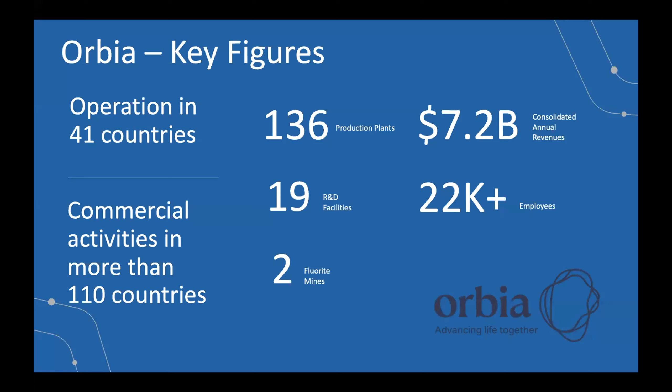I just want to start by talking about Orbia. Orbia is the mothership. It's the company that owns us. They're a fairly large corporation. They operate in 41 different countries. They have a bunch of plants. They have a lot of R&D facilities, a lot of people, and they also own 2 fluorite mines as well.

But when you look at their product sectors and their pillars, we're basically involved in building infrastructure, data communication, precision agriculture, polymer solutions, and fluor. So there's a lot of things that are interconnected in terms of our product lines and our pillars. When you look at Duraline as a company, we started back in 1971 and basically started in water and gas. So that's kind of where the birth of the company was.

I'm not going to go through all these innovations in history, but one of the things that Duraline has done very well is they've promoted new products. They spent a lot of money in R&D. To mention a few things that we're going to talk about, Silicore, which is now called Super Silicore. They've introduced things like aerial duct for above ground applications, locatable microducts, low smoke zero halogen, and FuturePath and jumbo, which we see in a lot of communication.

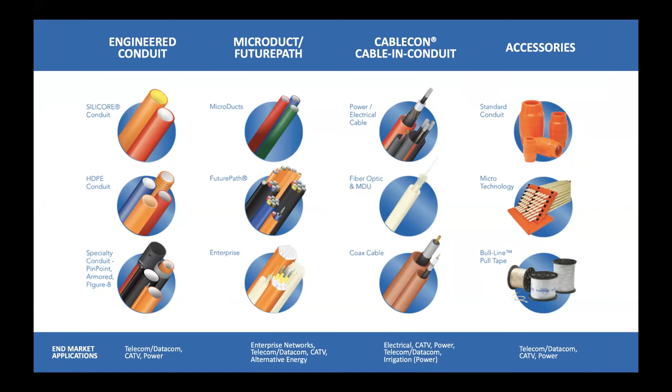And if you look at these engineered conduits and microducts and FuturePath and cable and conduit and accessories, a lot of them have surrounded themselves within communication cables. And now with the launch of PowerGuard, we're getting into the power side of cabling. When you look at Duraline in its global reach, we are all over the world, but you can see in the United States there's a huge footprint there, but we are global.

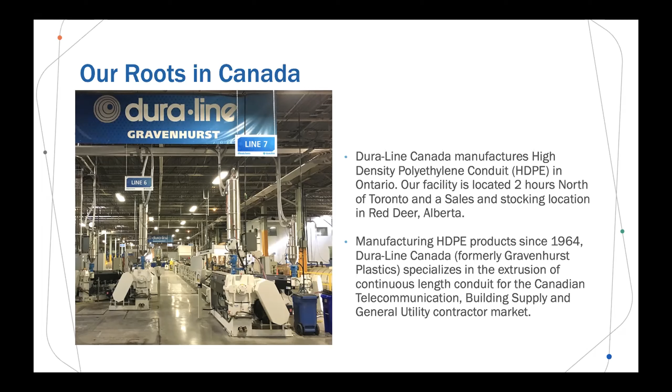And our roots in Canada: Duraline purchased our facility, which was 2 hours north of Toronto in Gravenhurst. It's now Duraline, but Gravenhurst has actually had a huge stand in the communication and the general utility contractor market with regard to high density polyethylene manufacturing, since 1964, so it's pretty incredible. We also have another facility, which is a sales and stocking location in Red Deer, Alberta. So we do have a bit of a footprint in Western Canada as well.

I wanted to talk a little bit about standard HDP resins and the difference with CSA high density polyethylene. I say all pipes are not created equal, and we have to look at the classification of resins. One of the things that we see with a lot of high density polyethylene manufacturers is that they'll use a lot of regrind. And regrind can come from sources that really aren't backwards traceable. So that means you're not using your own virgin regrind in your plant, you're buying regrind, you're pelletizing it, and you're using it.

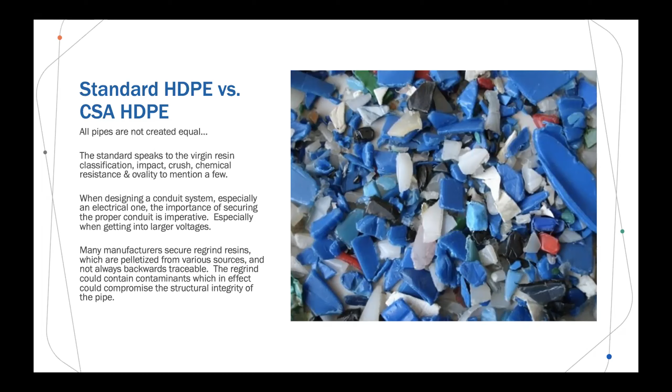So one of the things that's important to know is that the CSA standard actually calls for a specific resin. So you cannot use regrind. You can't even use your own regrind. So the good thing is you're going to get a good quality product.

Another thing I wanted to talk about, because this has been a confusion point for the standards for many, many years. Even back 20 years ago, you're looking at the B137 standard from CSA, and this standard has been used in a lot of electrical situations. What it is, it's a potable cold water listing for CSA. So if you see this for electrical, it's really not the right thing, but because there was no standard for HDP for electrical, quite often we would see this being called out. So now that we have a CSA standard, we really need to make sure that these two standards aren't getting confused.

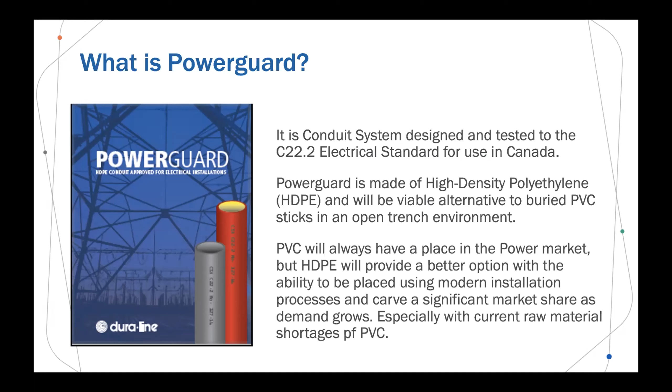So what is PowerGuard? Basically, PowerGuard is a high density polyethylene product, so HDP, that has been tested to the C22.2, which is the electrical standard in Canada, and is an alternative to PVC sticks in an open trench environment. It's just another product now that's been added to be able to be used in the C22.2. And when we look at PowerGuard as a whole, the C22.2 number 327-18 is the HDP listing, and this is what it looks like.

And it's also called out in the CEC, the 2018 version. So it is there. And for our testing, we have ETL testing through Intertek, which is tested to that CSA standard. And the thing that's really good about this is now you can use PowerGuard for up to 69 kV. So it changes the whole market out there in terms of what you can and can't use for electrical.

For some of you, this might be kind of ABC, but I don't know the level of understanding out there or what the need of learning is here. So I'm going to go through some of the traditional electrical conduit options. And what we see, of course, is rigid PVC. It comes in 10 and 20 foot sticks. It can't be horizontally drilled. The exception here is they do have a directional drilled PVC, but it is a little more expensive. It's not the standard PVC conduit, and you actually click them together. So it's not a continuous run, it's clicked together, and it is limited to 20 foot sticks.

Another electrical conduit you would see is DB2. PVC duct, very common, obviously. It comes in ranges of 2 to 6 inch. It's available in up to 40 foot sticks as well. It cannot be horizontally drilled, and it has a thin wall with low impact strength. And you've got to really look at your bedding when you put this down, because you don't want it shifting, because of its thin wall, it may be an issue for cracking as well.

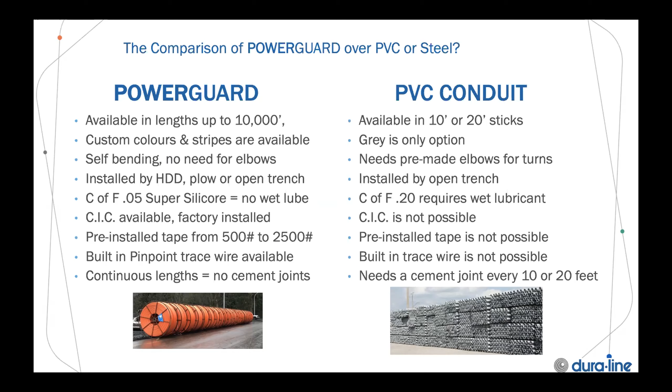CIC, cable in conduit, is available factory installed with PowerGuard. With PVC, you can't do that. You can also put pre-installed tapes from 500 pound to 2,500 pound. That's readily available. Although the standard PowerGuard right now is sold empty, so we don't actually put a pull rope in it, but it can be ordered with a pull rope in it. With PVC, you can't do that. We also have a product called Pinpoint, which is a built-in traceable wire in the wall of the conduit. So this can be done as well if there's a need for that. Obviously, you can't do that with PVC. And then, of course, the big deal is it's a continuous length. So you're not joining every 10 or 20 feet like you would with standard PVC conduit.

I want to talk about the two options for contractors. So there is the PowerGuard, which is a solid wall HDPE. It comes in a variety of different wall thicknesses. It's available 1/2 inch to 5 inch in a continuous run and 6 inch in sticks. They all come with super silicore.

PowerGuard Flex: for some of you who may know Duraline from before, they have had a product called Smooth Core Flex, and basically that Smooth Core Flex has been around for years and years. It's a US product. Unfortunately, it does not carry a CSA listing, and PowerGuard Flex at this point right now actually will be launched and is pending approval, and we should have it going in probably the summer or late

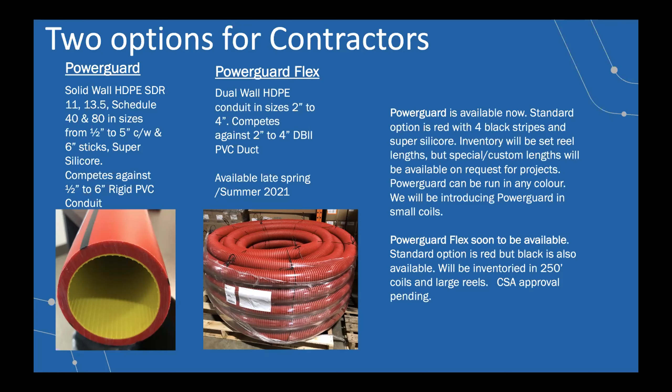spring this year. So PowerGuard Flex, it's a dual wall HDP, which will be in sizes 2, 3, and 4 inch, and it's going to compete against 2 to 4 inch DB2 ducts. So that's sort of what we're seeing out there in terms of the two different products and where we're going to be placing them.

A little bit of information on plastic. When we look at PVC and HDP, they were both launched in the early 1900s, PVC being first in 1912, HDP being created in 1933. The difference between the two products is PVC is basically 73% of additives for plastic. So there's a lot of things that they put in there to make it hard or flexible and different things, whereas HDP basically has no chemical additives in the mix.

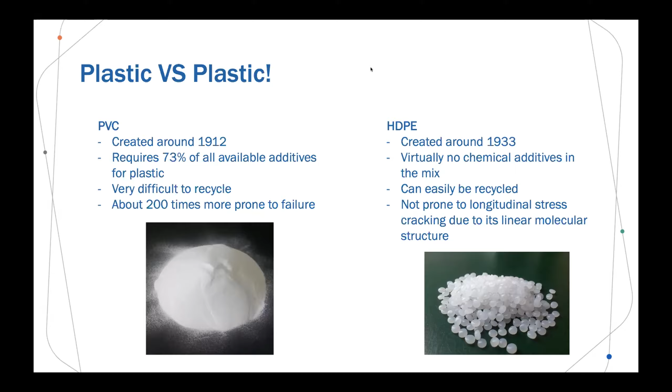And when we look at a few more plastic facts here, because HDPE is chemically resistant, it doesn't leach chemicals into the ground. And this is a big deal, for instance, for California. But a lot of cities and countries are looking at this, whereas PVC can leach chemicals over time. They're called phthalates, and they do pose harm to people, groundwater, crops and wildlife, because it gets into the water system, gets into the crops, and animals eat it, we eat it. So we see these chemicals all over the place.

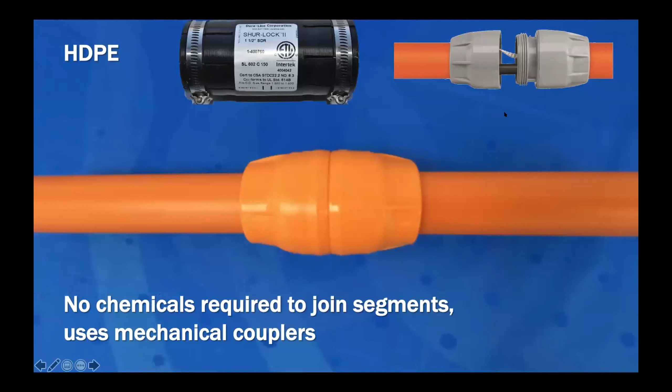One of the nice things with HDPE, as far as joints and segments, we use mechanical couplers to do this. So we do have a Shur-Lock coupler, which is CSA listed, and we do have these push fit couplers. So we have a bunch of different couplers that are easily used and will actually join rigid PVC to HDPE because they have the same basic outside dimensions. So that's something to keep in mind.

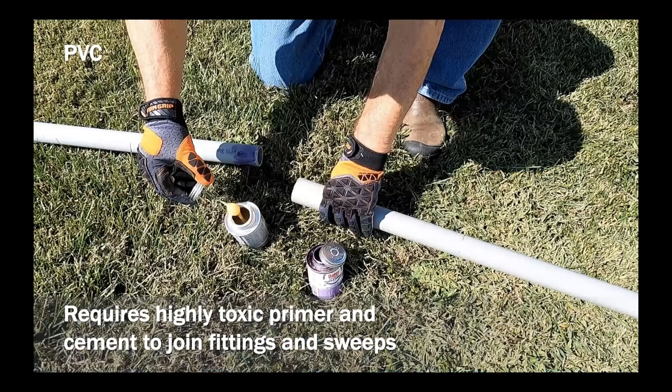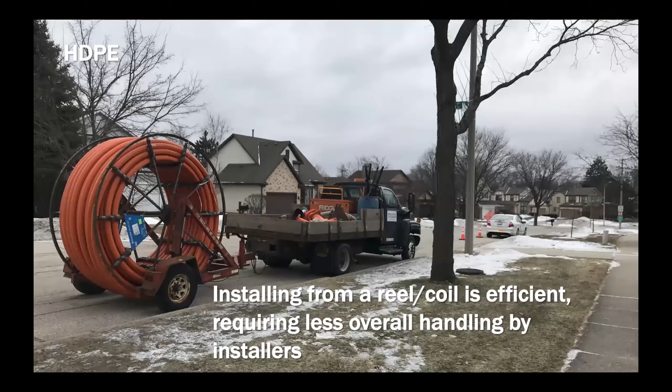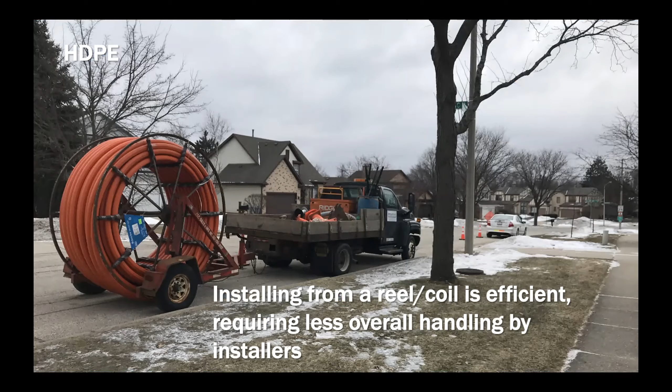With PVC, you're usually using joints that are glued with a primer or a cement for all the joints and sweeps and fittings. With HDPE, you're normally installing from a reel or a coil. So in a lot of cases, there are some efficiencies that you don't have with using stick pipe. There's obviously a little bit less handling from the installers, depending on how you install it. With sticks, you've got to hand carry them into place. And safety is a big thing these days, so there is increased risk of injury for some installers.

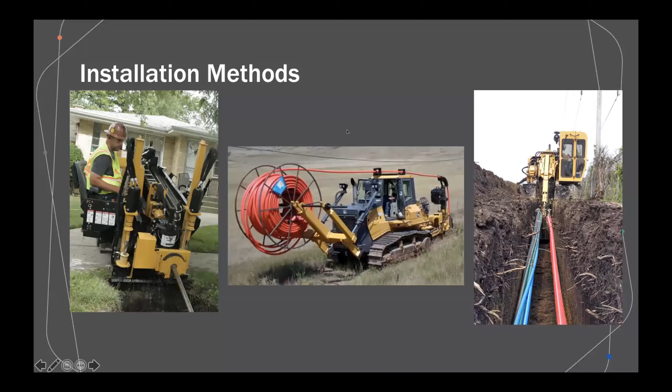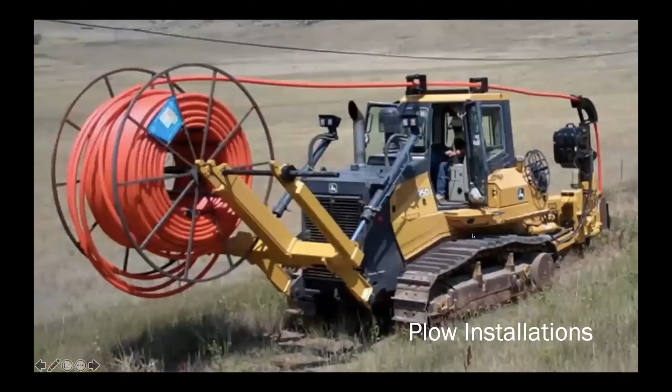Wanted to cover off some of the installation methods as well. So basically, the biggest one that we all see is horizontal directional drilling, where they're directional drilling it in specifically where they want it, and then they're going to pull in the HDPE after. And then this is a plow installation where they're taking the full reel, running a plow and depositing it. You would see this in rural areas along open highways, stretches of open areas. Up north, you would see this a lot too.

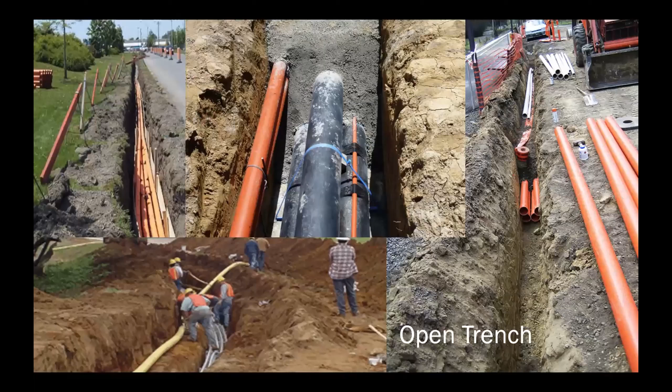And then open trench. So here you can see a bunch of different applications. Here on the left, a bunch of HDPE in the ground. This is a nice combination where they probably have some plumbing and electrical, and they also have a small microduct here. We're seeing a lot of plumbing and different applications that require signaling and electrical applications. On the right, looks like we're seeing some PVC as well, one on top of each other. They've got the warning. So this is obviously low voltage, so they don't have to use separators or spacers to separate everything there.

And the other thing that's interesting about HDPE is it actually works very well in the cold. So it lends itself that way in terms of not becoming brittle, and it actually will stay flexible, which is kind of great in terms of when you have ground heaves or settling, you're not going to have the HDPE cracking because there's not a lot of joints.

So that's really good. And then when you look at installation, the actual minimum long-term cold bending radius is very good with HDPE. Obviously, it's going to depend on your SDR or your wall thickness, but the bending radiuses are fantastic. So that's another thing that's important.

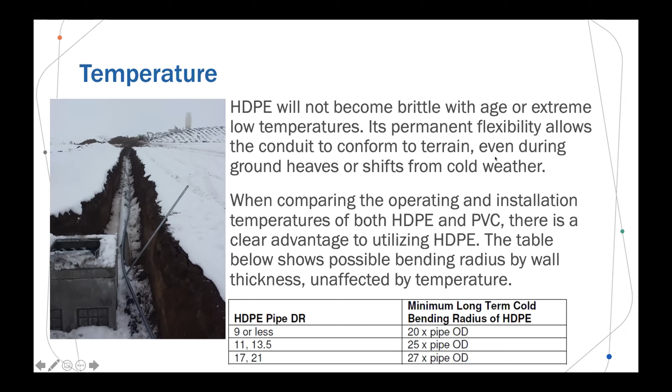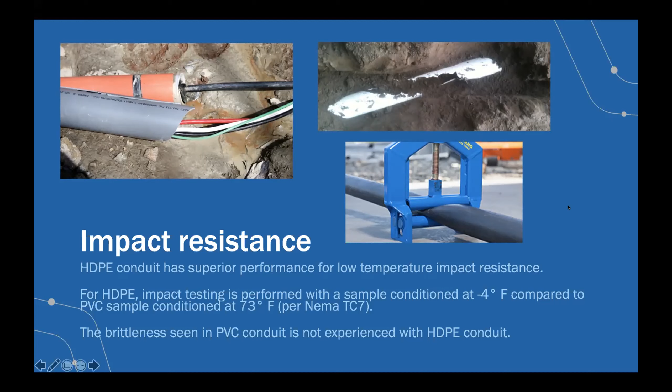Impact resistance. I was actually surprised when I found this out, but when you look at data sheets for a PVC pipe versus an HDPE pipe, what we see is different temperature ratings that they're actually tested at. So a PVC pipe is conditioned at 73 degrees F, and an HDPE pipe is actually conditioned at -4 degrees F. So the testing right out of the gate is completely different. So when you're looking at a data sheet, sometimes it's difficult to understand what the real data says. But definitely, you're going to see good impact resistance with HDPE.

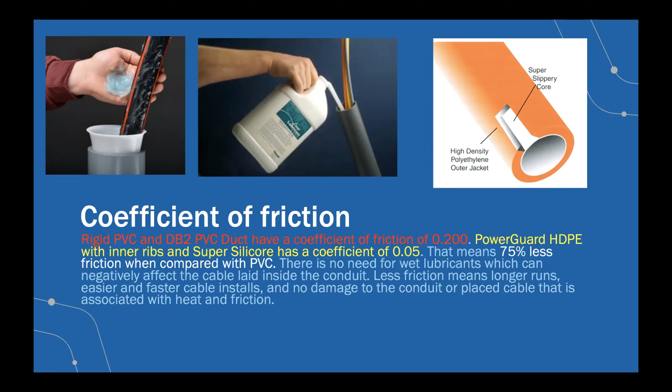And again, coefficient of friction. We touched a little on this earlier, and one of the things, right out of the gate with these two products, is you're 75% less coefficient of friction with no wet lubrication. So this is huge. And when we start looking at communication cables versus electrical cables, they're very different, because you're going to see much smaller diameters on the communication cables of fibers, where electrical cables are going to have larger diameters. So this plays a huge role in terms of installation and how it can lend itself well to the installer.

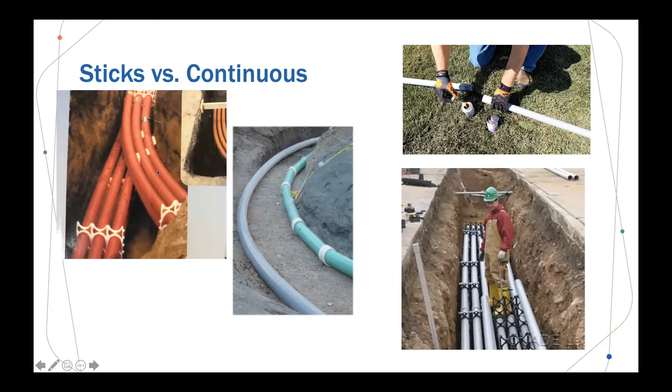Here's a basic bed that you would see with spacers. You've got to clean that all out, make sure you've got proper bedding and put that in. And on the left here, you can see some spacers on the HDPE, and it's quite a nice run with easy bends. So you're not using bend sweeps or joints at that point.

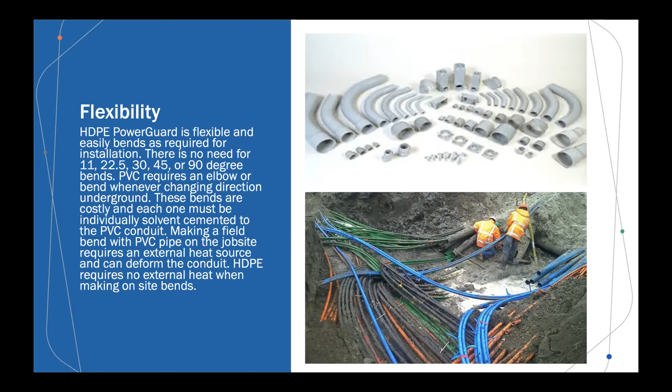But again, I'm going to say to you that the HDPE, because of the outer diameter, will fit all of those PVC accessories. So if you're running the HDPE and you've got to come up to a pole, you can use a bend. You can use one of our Shur-Loks to connect to it, and then you can come up, no issues there. So there's endless combinations of what you can do to bring things above ground.

And then I want to look at what is the sales and marketing strategy with regard to PowerGuard. And one of the things that's nice is when you're selling to customers, you want to use that grocery cart mentality. You want to have more SKUs, fewer items, with a mix of PowerGuard and other products. And the good thing about that is it allows a guy in a truck to come in and pick it up. And we need to concentrate our strategy on smaller reels, maybe lengths and coils.

So not large reels, but we want to give that ability to the small trucks and pickups, so that they can come and pick up smaller diameter PowerGuard, to compete against guys that just come in and throw a few sticks of rigid conduit in the back of their truck, and eventually we'll do the same thing with the PowerGuard Flex and smaller coils to compete with the DB2 market. That probably won't be, like I said, till late spring, early summer.

What other markets can we look at with PowerGuard? A big one that we see right now is street lighting, parking lot lighting, residential, renovation, smaller scale, municipal, hydro, new subdivisions. There's probably others here that we can talk about after, or if you have suggestions, feel free to put them in the chat or questions. Hopefully I'm not going too fast here. But yeah, we can talk about that after.

And now I want to talk about cable and conduit. Let me do this first though. Jordan, are there any questions or anything that are burning on the PowerGuard that we want to take care of now, or do we want to wait until the end? I'm not seeing anything right now, but I'm still monitoring the chat. So if anyone wants to, they can go ahead and use the Q&A feature, and I'll let you know. Perfect. Okay. So we'll talk about cable and conduit.

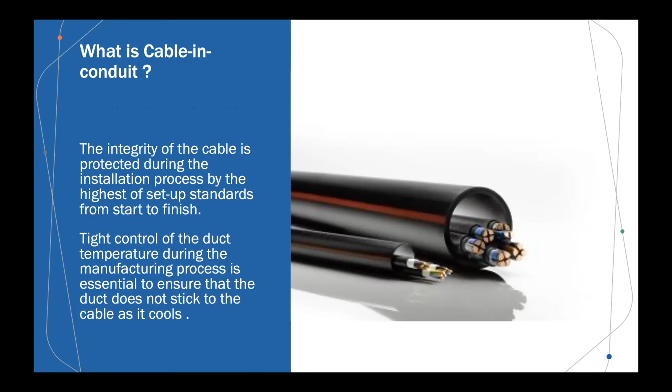So one of the things that's good is, we're looking at the integrity of that cable because we want to make sure that we do all the proper setups. We're keeping the standards up there from start to finish. We want to look at temperature, manufacturing process, and make sure that the cable's not going to stick to the wall of the conduit. Obviously, that's going to be a big problem if you're trying to move that cable inside the conduit. So there are all kinds of things involved to make sure that we don't have issues there.

When we look at the actual testing, we do test the communication cables prior and after the duct has been extruded around the cable, to ensure that there's no performance loss of that cable. And with electrical cables, it's a little bit different. We don't normally see testing. They're much more rugged, and they're not prone to damage or bending, or we don't see a lot of issues there.

So what are the benefits of the CIC? Obviously, the continuous length with the pre-installed cable inside. It's going to protect the buried cables from harsh environments. You're going to see less digging mishaps, rodent and animal exposures to unprotected cable. And when companies are spending a lot of money to put cables into the ground, they want to make sure that they have some kind of insurance. So that conduit is going to give them that insurance once it's in the ground.

What are the other benefits? The biggest, obviously, is you're going to save time. You're going to save labor and costs associated with pulling and jetting cables. So that's a big deal. There's going to be opportunity in rural and outlying areas where labor can be an issue. If you've got a job, say, in Northern Ontario or anywhere north, it could be transportation, it could be the actual labor to put it in the ground. It's going to be a huge savings.

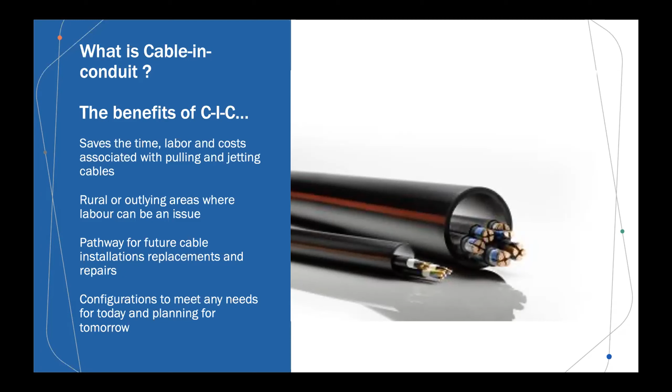When we look at pathways, companies might want to look at future cabling installations and have the ability to replace and repair cables that are in there. So if you've got a conduit system in there and you want to replace that cable, you're not digging, you're not damaging, you literally pull that cable out and put a new one in. And then looking at possible configurations for the future. Sometimes companies will want to put in a cable, leave it in there and use it later. So that's another option that customers have as well.

So when we talk about our capabilities, basically right now our capabilities have been about a 2.5-inch maximum conduit size. We're looking at a diameter of a cable of about 1 1/8. We do see multiple cables, so 7/8, we can put 3 in. We see this in street lighting applications. But we do feel that the 0.35, 0.45, and 1.23, which are common in street lighting, are absolutely doable.

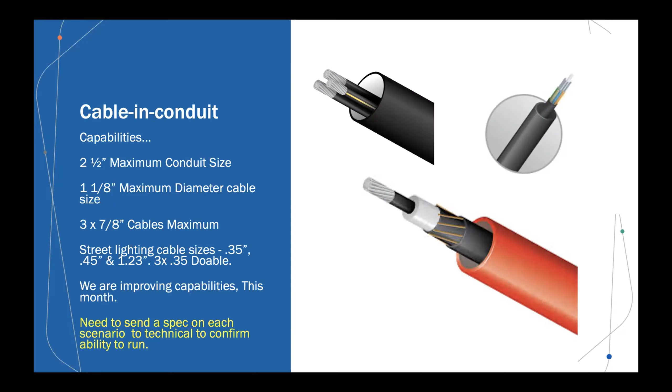And one of the great things right now is we're actually improving our capabilities. So we feel we're going to be able to get to a 3-inch conduit very soon. In fact, maybe later this month. I don't want to push the envelope too quick, but we are improving the capabilities right now. What I recommend to anybody that's interested in doing this is to send us a spec or a technical document on the cable itself, so we can look at all the parameters of how you want to run it, or how we're going to run it as well.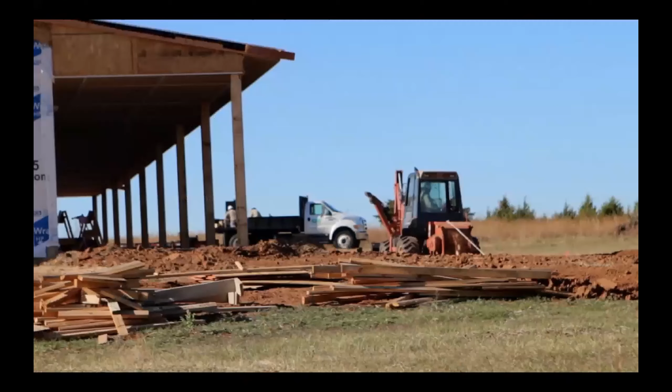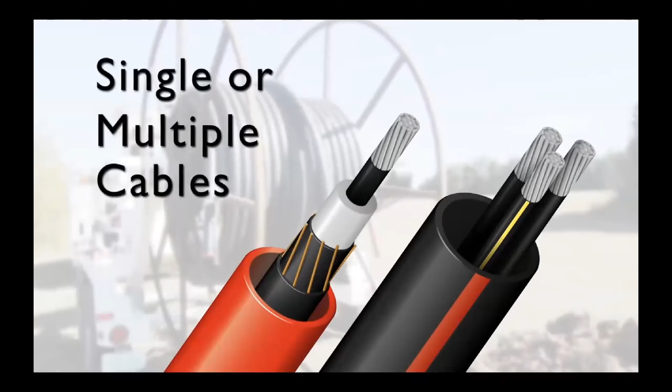Duraline brings you our cable in conduit product, CableCon. Cable in conduit is a high-density polyethylene HDPE conduit system with factory-installed cables. Cable in conduit, CIC, is used in a variety of applications as pathways for delivering power, broadband, and communications. CableCon is a versatile product that can be manufactured in many configurations. Conduit size, color, and stripe are all easily customizable. Single or multiple cables can be factory installed in CIC. Typical cable components of CIC are service drops, fiber, coaxial, lighting, and power utility cables. Duraline's experienced staff will find the wire or cable to suit your project's needs, or you may specify your own.

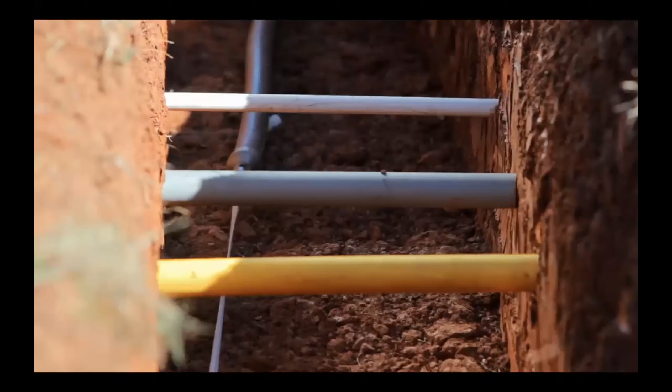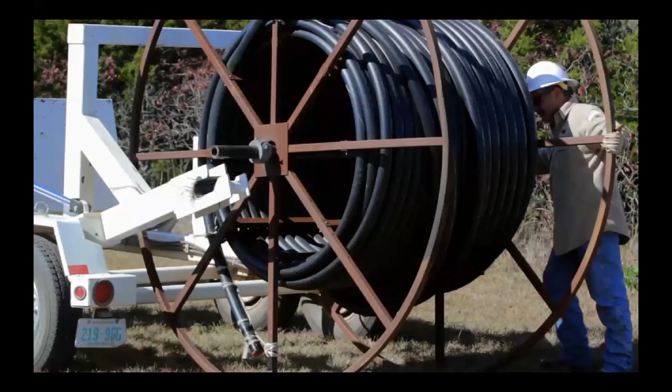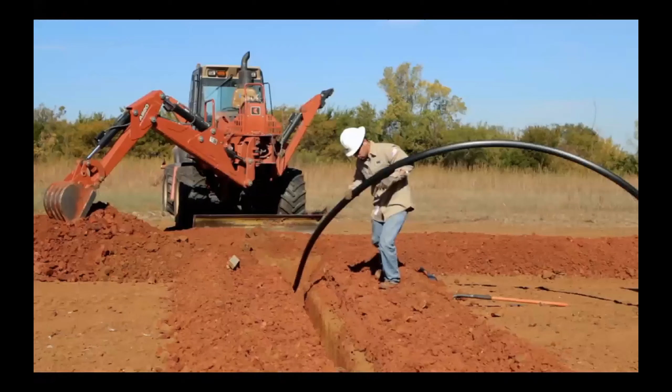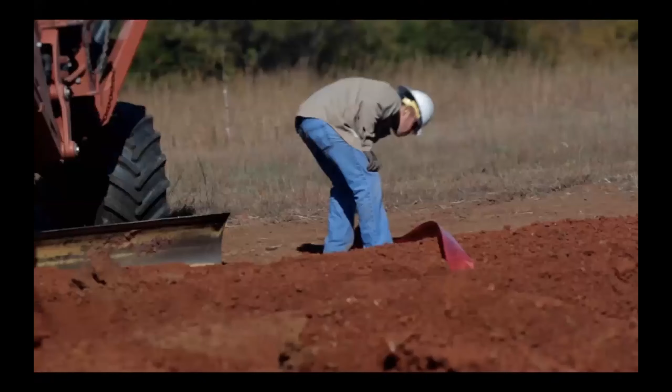Cable in conduit has many advantages over both directly buried cable and PVC pipe and wire systems. Direct buried cable leaves your cable vulnerable to installation abuse and ground hazards, leading to increased failure rates. PVC pipe and wire requires a 3-step installation process: one to assemble the PVC, one to install the pull rope, and the last to pull the wire. More frequent manholes and splices are required for the shorter pulls. Using cable in conduit, CableCon, the advantages are simple. Cables of your choice are factory pre-installed in the high-density polyethylene conduit. HDPE conduit is flexible and lightweight for easy installations. CIC is delivered in a continuous length on a reel. It is a one-step installation of both the cable and the conduit. Cables are factory installed, resulting in a damage-free environment from delivery throughout the placement process. The conduit is in place for future upgrades or repairs without incurring additional construction costs. Faster installations with fewer required crew members saves both time and money.

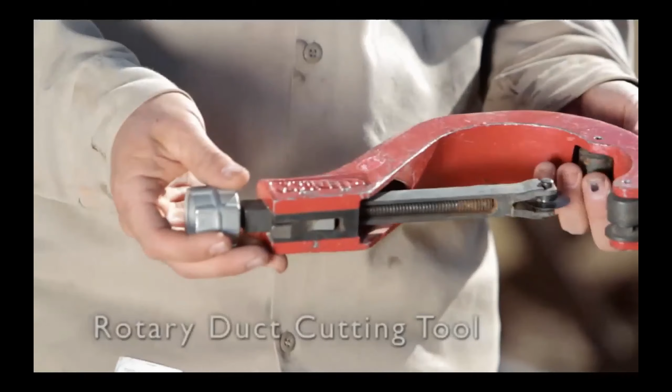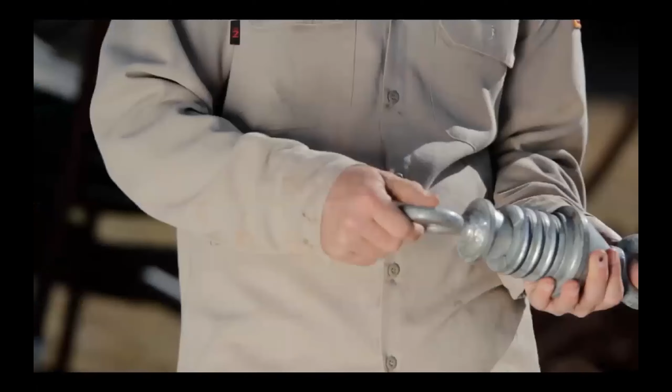Cable in conduit can be installed and buried in underground environments. Typical placement methods are conventional trench, backhoe trench, directional boring, or vibratory plowing. Please be aware of and follow all safety precautions required for these types of construction methods. There are a few tools that make installing cable in conduit more efficient and easier. A rotary duct cutting tool, available to cut different diameters. A ratchet cutting tool. A longitudinal duct slitter slits the HDPE safely away from the cables and helps in securing the cables prior to cutting. An expandable pulling eye, size specific. A 5,000-pound pulling swivel attaches to the pulling eye. A snatch block. And 6,000-pound bowline pull tape.

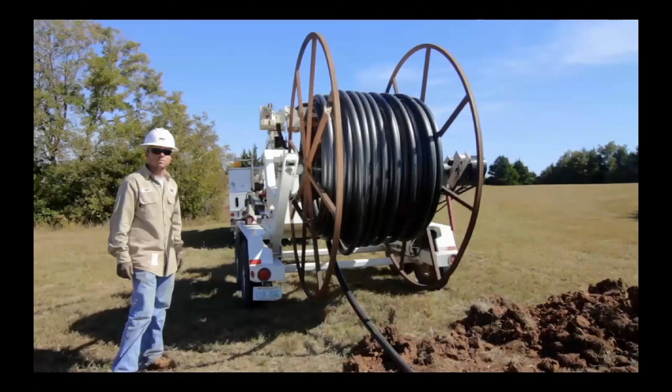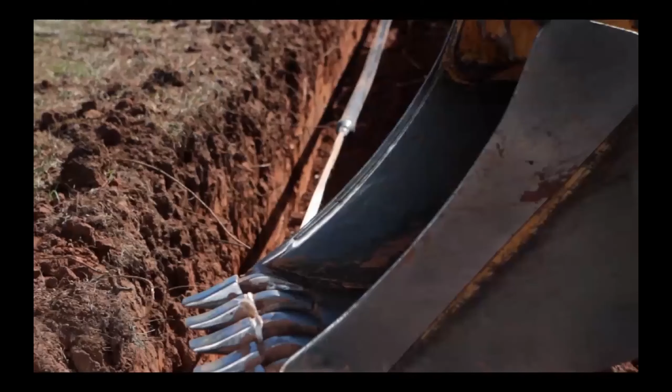CableCon placement practices. When setting up the reel of cable and conduit, load the reel so it pays out from the bottom of the reel. To prepare the cable and conduit, remove the seal at the end of the duct, cut the tape attached to the cable or cables in the conduit, allowing them to move freely within the conduit. A note to installers: all reels of cable and conduit have more conduit than cable on the reel. As the CIC is installed, the cable will draw back approximately 1.5% into the conduit at the payout end. For example, on 500 feet of CIC, the cable will draw back roughly 7.5 feet from the payout end of the conduit. Let's look at a few different cable and conduit placement options. Conventional trencher installation. Place the reel trailer at the most suitable location for payout. The center of the reel should be aligned with the digger arm of the trencher.

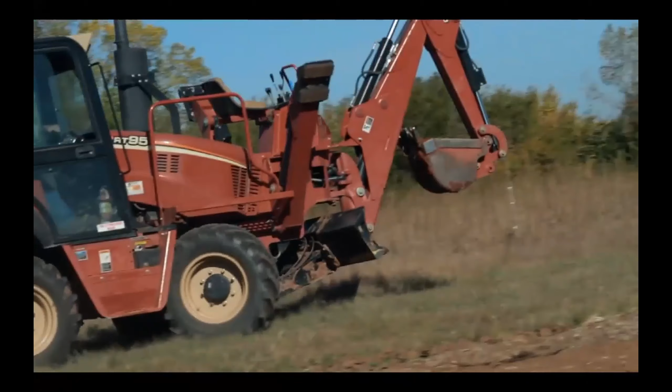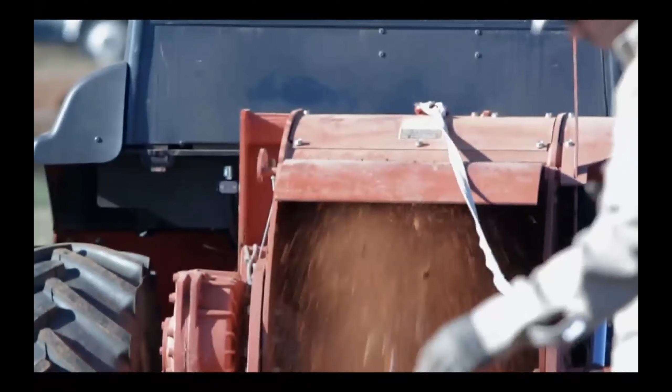Attach the expandable pulling eye with a swivel to the payout end of the CIC, on the conduit, not the cable. Position the trencher along the predetermined path. Attach a length of the bull line pull tape from the swivel to a secure location on the trencher. Begin trenching. As the trench is cut at the appropriate depth, the CIC will pull off the reel directly into the trench. Once the trench is complete, raise the trenching arm and move forward, pulling an extra length of the cable and conduit for termination.

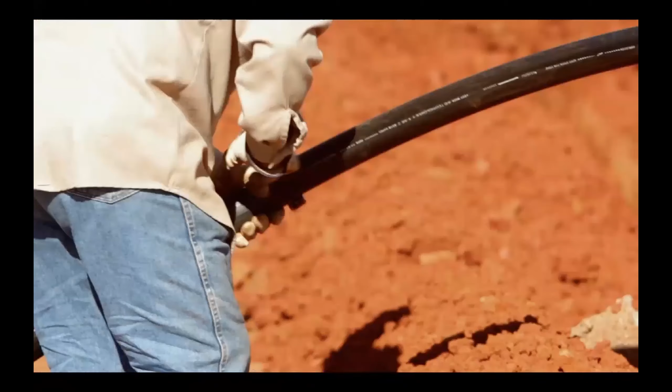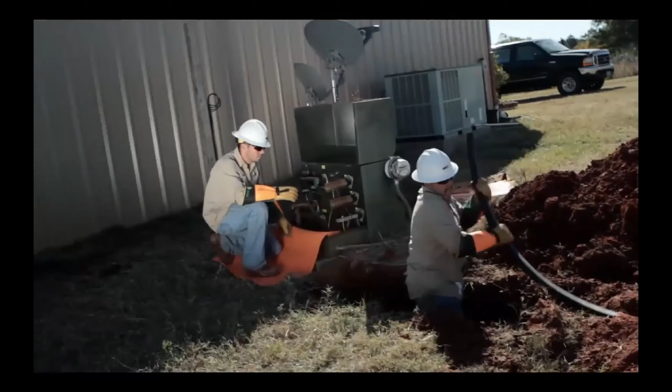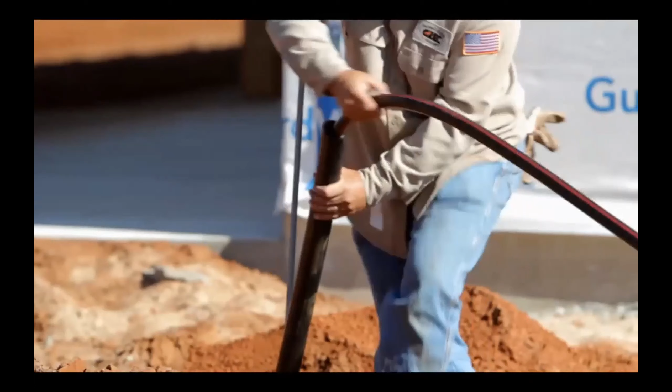This was a box-to-box residential installation 302 feet long. There were 2 vertical 90-degree bends and 1 horizontal 90-degree bend. The CableCon was 2-inch Schedule 40, which delivers 2,500 feet on a 96-inch reel. The cable was 1/0, 25 kilovolt, 260 mil EPR, jacketed with a full neutral. After the cable and conduit was installed in the trench, we were able to hand push the cable through all 302 feet. It required a 2-person crew for installation.

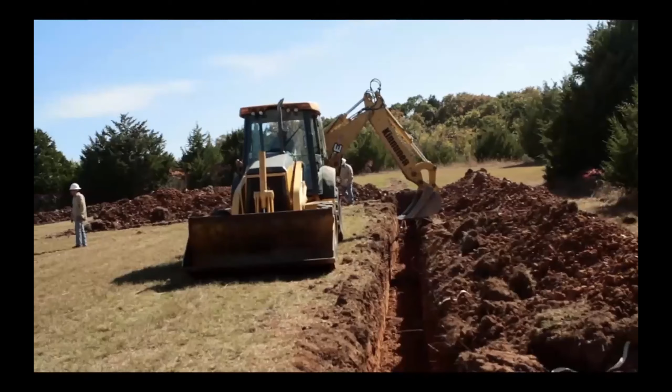Backhoe trench installation, no obstructions. When determining the route of the trench, plan for the best location to place the dirt, allowing a path for the backhoe to run parallel to the trench to pull the CIC. Backhoe the trench with minimum number of 90-degree bends. Once the trench is complete, inspect the trench, leveling all high spots and fill in any low areas. If any 90-degree bends are necessary, undercut the bends by rounding them with a shovel into 2 45-degree bends.

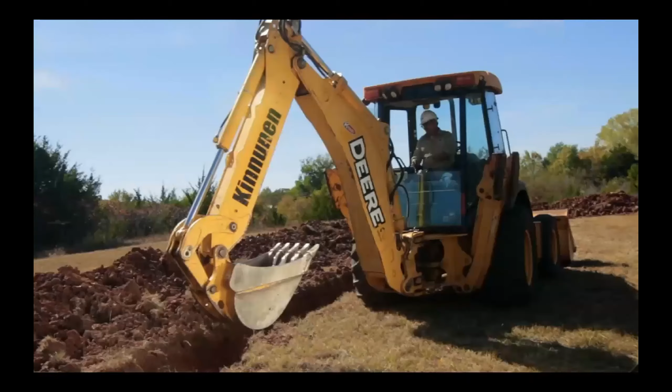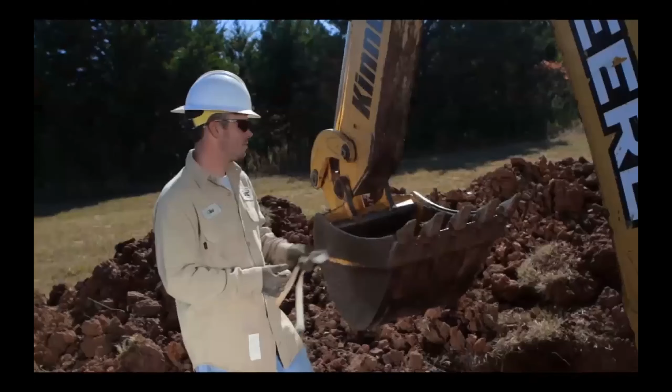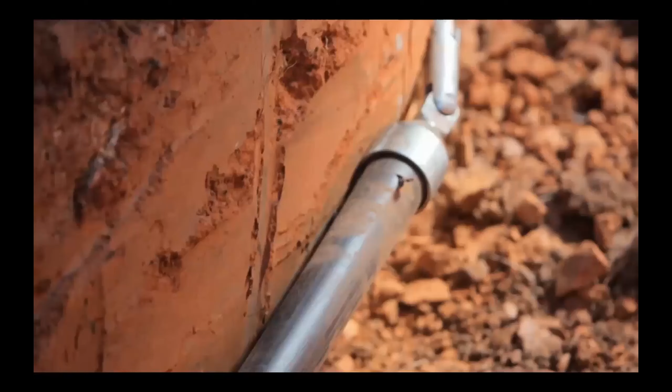Once the trench is prepped, position the reel trailer at the payout end of the trench. Set the backhoe parallel to the trench and lower the bucket directly above the trench. Attach the pulling eye and swivel to the payout end of the conduit. Attach the bull line pull tape to the swivel and secure the opposite end to the bucket of the backhoe. The backhoe operator will drive parallel to the trench, pulling the cable and conduit directly into the trench. The backhoe will be able to pull the CIC around all bends in the trench. Once the cable and conduit is placed in the trench, the backhoe operator can overpull some extra length for termination. At the reel end, hand pull the required length for termination.

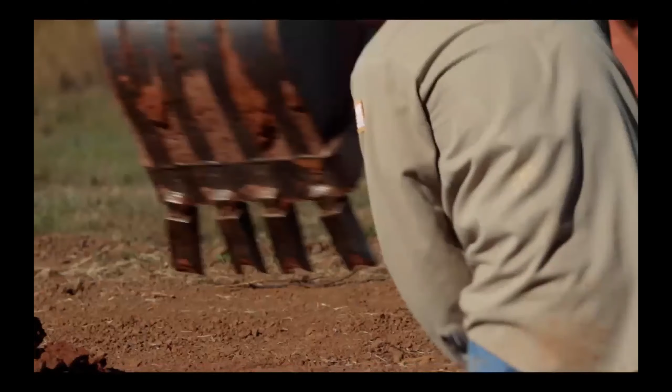If lateral obstructions are present in trench installation, review the trench route, locating and marking all lateral obstructions. Plan for the best location of the dirt that's removed from the trench to allow for easiest passage of the backhoe. As the backhoe is digging the trench, hand dig the areas around the lateral obstructions. Once the trench is complete, inspect the trench, leveling where required, and undercut the 90-degree bends.

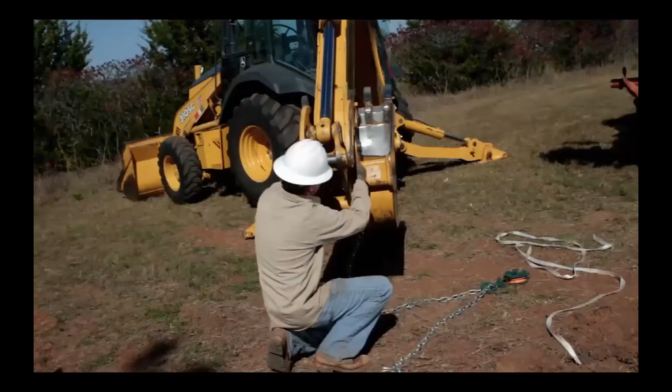After the trench is prepared, install a 6,000-pound bull line pull tape throughout the route, under all lateral obstructions and around all bends within the trench. Use a fixed object at the end of the trench as an anchor. The anchor can be a vehicle, tree, or pole. We are utilizing the backhoe. At the anchor point, attach a snatch block with a chain. Then thread the bull line pull tape through the pulley in the snatch block.

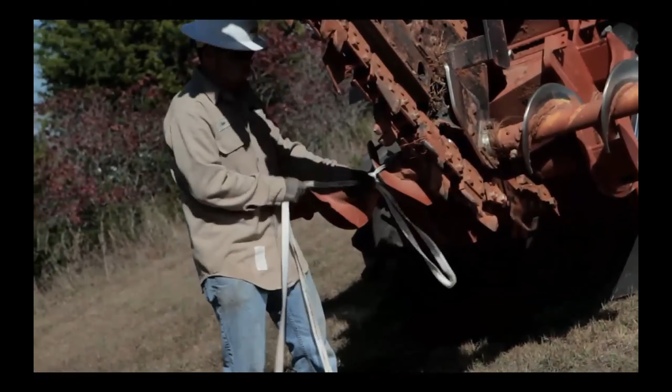Align the reel trailer with the center of the trench and attach the pull eye and swivel to the payout end of the duct. Attach the bull line pull tape to the swivel. At the opposite end of the trench, attach the other end of the pull tape through the snatch block pulley to the moving vehicle, in our case, the trencher. Have the operator drive away from the anchor point. As the pull tape moves through the ditch, the CIC will follow the tape under all obstructions and negotiate all bends within the trench. Remember to pay off additional footage for termination at both ends. Utilizing a snatch block is a good solution when there are limited right-of-way issues.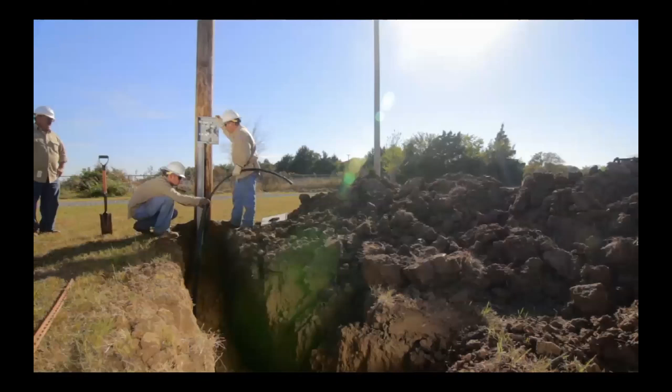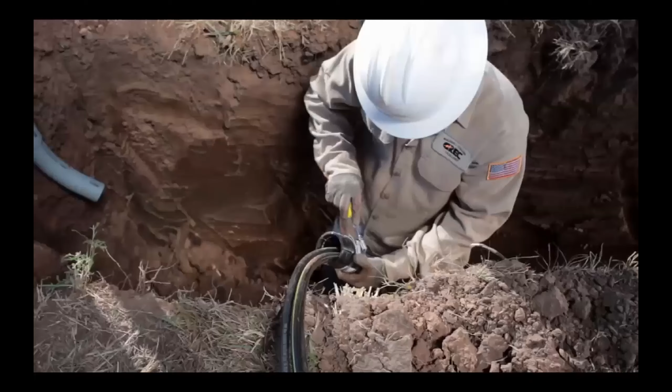Transitioning cable and conduit to a secondary meter base is a simple process. Here are 2 popular methods. First, sleeve the CIC directly into the 3-inch pipe exiting the meter base. The excess conduit can be cut, exposing enough cable to feed into the meter base for termination. Alternately, use a 2-inch pipe with a sweep from the meter base. It's easy to transition from the HDPE cable and conduit to the sweep with a 2-inch Shur-Lock coupler.

As you've seen, CableCon cable and conduit provides a one-step placement and a damage-free environment for your cable. One-step placement of cable and conduit saves you both time and money.

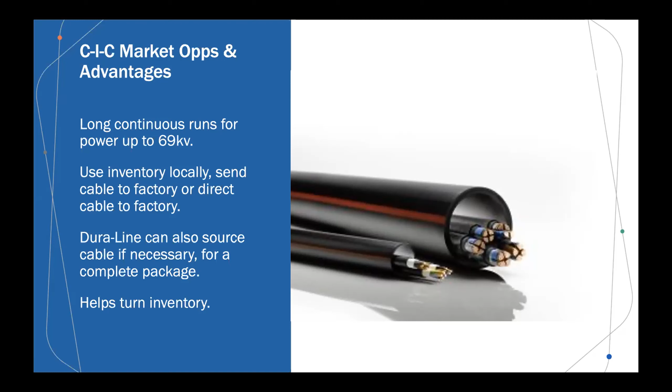So when we look at the opportunities, advantages, long continuous runs for power up to 69 kV, because that's what the standard calls out. You can use your inventory locally, so you can use your own. You can send cable to the factory, so you can send it to us directly and we can put that in for you. And in some cases, there might be situations where you want us to actually get the cable and just give you the completed system. But obviously, it's better for you to use your own product and then turn your own inventory. And that's the advantage of putting some of this product in, depending on where we can find some advantages.

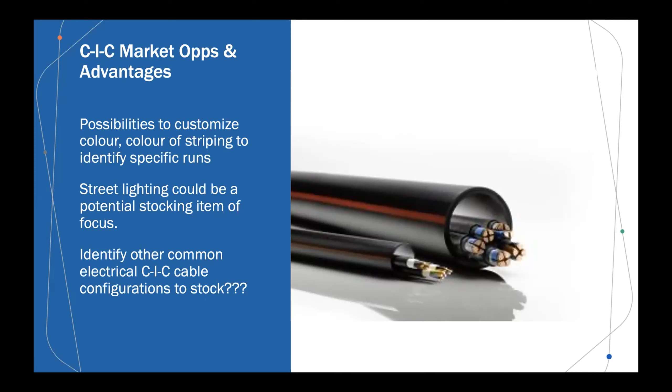There's possibilities to customize color, stripes, and identify specific runs or for specific customers. Again, there will be MOQs attached to that. But I still think street lighting has a huge potential for us as a standard stocking item and focus for contractors that are using this product now. We need to look at other electrical cables where we could use CIC and in a configuration that you'd be able to stock. So those are some of the things I don't know, and maybe after this we can have some discussion about that. We can throw it out there.

And then lastly, when you look at the actual product line, there's other things. There's the push locks, the Shur Locks. We have a whole range of lubricants and gel type lubricants that are available. So it's a great way to go out there and get yourself in there to talk about it, and then bring in the PowerGuard after. And then pull line tapes, we have a full range of pull tapes, some that are detectable, some that are different ranges in weights and pull strengths. So that's something to look at as far as what else can we do to add to this.

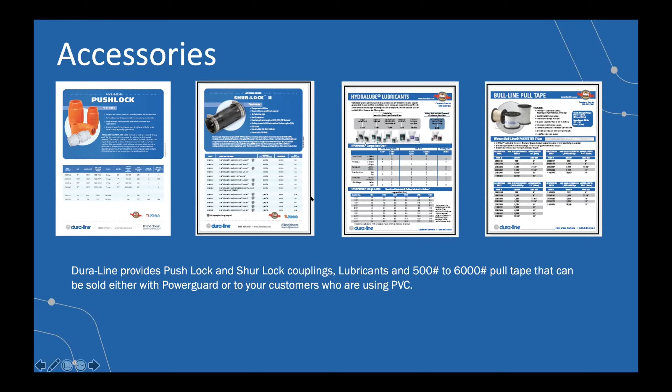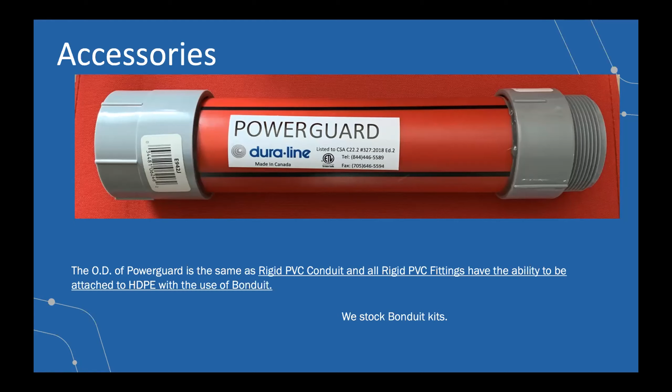And then the other thing I wanted to talk about quickly was this picture shows rigid PVC actually glued to the high density polyethylene. And there are products out there. They're two-step kind of products. The one that we used to do this was Bonduit. So Bonduit will basically glue PVC, steel, all types of different products. But in this case, it's the PVC conduit that we've glued. So you can glue if you wish to do that or want to look at that as an option.

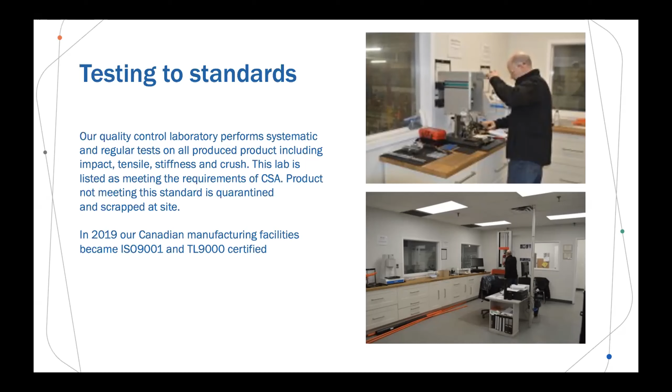And I guess the big thing really with Dura-Line, which is kind of exciting, is, in 2019, our facilities became ISO 9001 and TL 9000. And this doesn't mean a lot to an installer, I guess, in a sense that it's an indication of the things that we have to do. But what it does mean is that we're constantly testing our products because we have to follow these standards. So we're looking at impact, tensile, stiffness, and crush, round. And the chances of bad product going out are very, very minimal. And we're excited about that. But anything that doesn't look good, we usually will quarantine it and scrap it right on our site. So this is just a little bit of extra insurance for everybody down the line, including end customers as well too.

And when you look at this product, the PowerGuard product, I think it's going to be a game changer because, maybe 10 years down the road, people are going to say, oh my gosh, remember when we used to glue those sticks together and now we can use this continuous run. So, I think that's going to be the change for sure.

And kind of just to recap the sales strategy here, again, with the PowerGuard, we want to look at small reels, lengths, and coils so that we can attack smaller users, guys in a truck or whatever. For CIC, we want to use your local inventory or other options, of course, that we can look at in terms of sourcing cable for you, or you having cable sourced and sent to us. And then what are the other focuses we can look at other than street lighting? And then again, the accessories, the pull line tapes, the lubricants and the couplers.